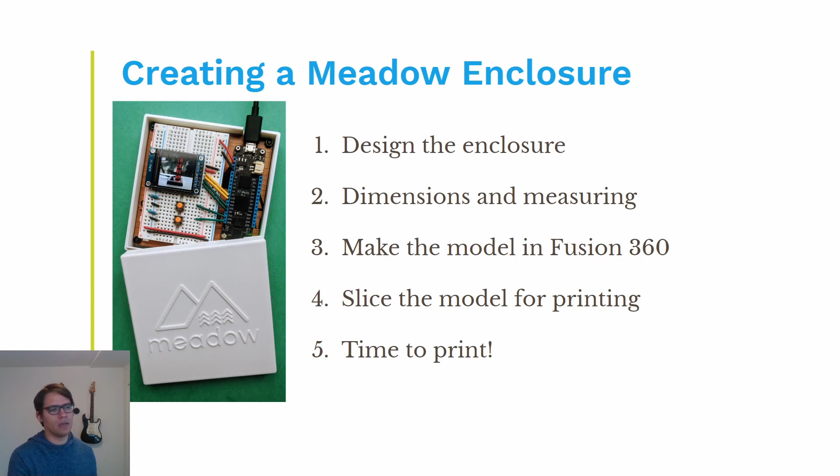So what are we making? Well, as I said at the beginning, we're going to make a Meadow enclosure for your dev kit, which is the one you see on the slide. It's just this little box here, where you have your Meadow dev kit here, and you also have a little hole here so you can connect it via MicroUSB. Even if your box is closed, you are still able to plug it in.

We're gonna put a branding Meadow logo on the top, and so yeah, this will be the end result. Notice that on the inside of the box we have these little cubes that are just gonna help you lift your Meadow dev kit in case you don't have those stand-up legs on the corners of the wooden board. So it'll make your dev kit, your Meadow, sit nice and flat in the box.

So the first step will be drawing your enclosure. You have to get a pen and paper and start drafting what your end result is, what you want to accomplish. So in this case, we want to make a little box for the Meadow enclosure. So I made here a representation of what you might end up making depending on your drawing skills.

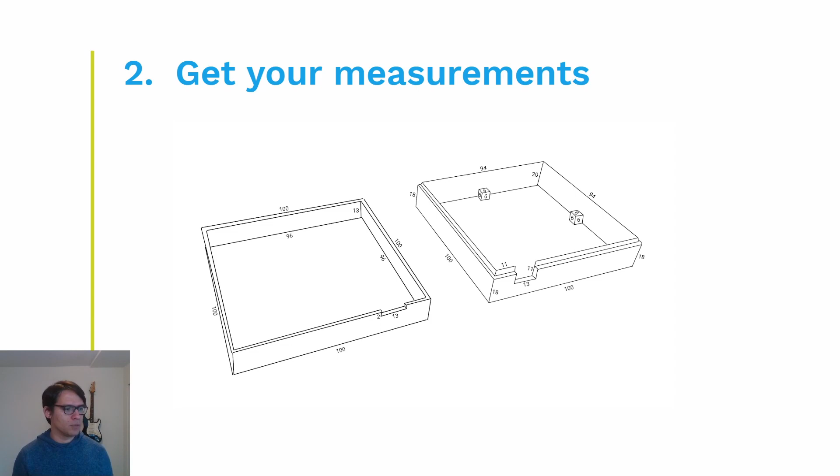So yeah, step 3, let's make it all in Fusion 360. So let's just get to it. I'm going to transition here to my other screen. There you go. You should see now the screen for Fusion 360. It's modeling software by Autodesk.

There's also a free version. It's a personal, not for commercial use version that you can download, and you can just take advantage of all the different features that they provide. And it's actually a really great tool.

I'm very new to using the software, so I'll try to be as simple and explain it as clearly as I can. I'm sure there are other ways of doing things that could be faster and more efficient. I am relatively new, so I'll just show you how I went about building this box from the start.

So the beginning of this landing page on Fusion 360 is the structure of the project. It's based on components. Right now, in the brand new project, you'll have one component.

It's expressed in this white icon here, but then you can also create subcomponents inside, which in this case is perfect for what we're going to do, because we are going to create two components or two parts for this project: one for the lid and the other one for the base of the box. So let's start putting together the base of the box.

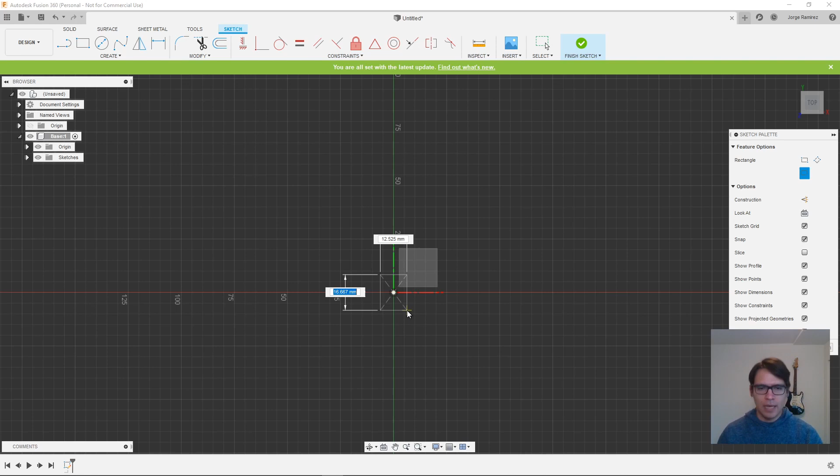So we click here, and notice that you can first select on which plane you want to make this first sketch. So I'm gonna select the Z component, and this will be the first sketch that we're gonna make. So the first thing that we're gonna do is build the base or the floor of your box. So we're gonna press S here, look for center rectangle, and then we click the origin so our box remains nice and centered, and we're gonna make this 100 by 100 millimeters like that.

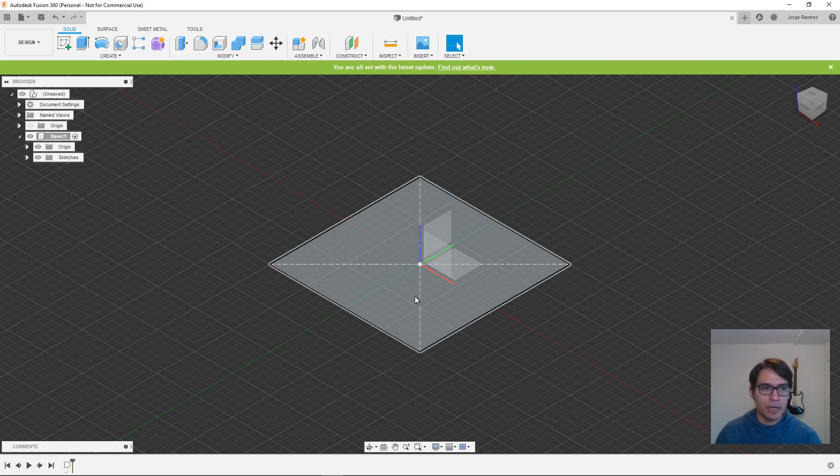And now that is our first sketch, which will be for the floor of our box. So we click finish sketch, and now that we have our square 100 by 100, we're going to use this feature. It's the one that I've used most, the extrude function, and we select our sketch, which is our 100 by 100 square, and then we're going to extrude this. We're going to pull it up to start creating volume, 18 millimeters. Great. So now what we have is a 100 by 100 by 18 millimeter box of solid PLA plastic filament.

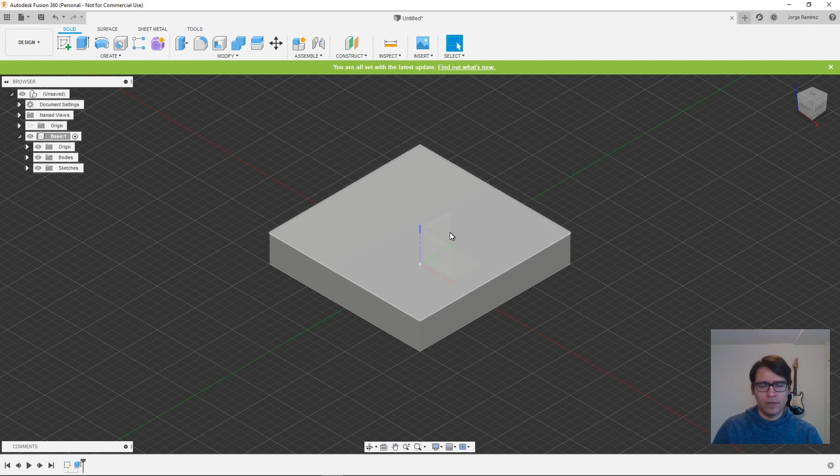So right now that's good, but we need to make it hollow so we can fit the Meadow inside. So we're gonna create another sketch, and this sketch won't be against any of these planes. We're gonna select one on the top face or the top side of the cube that we just made here, the box. So we select it, we go back into top view, and we're now going to create two rectangles, and I'll explain why.

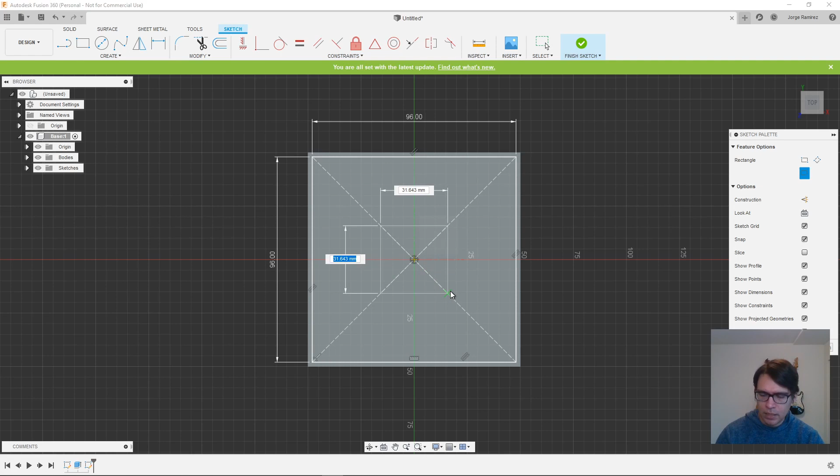So we're gonna create one that'll be 96 by 96 millimeters, and then another rectangle that will be 94 by 94 millimeters. All right, why did I need to create two squares? Well, because the box, you'll see that we have an inner border here that will help us make the seal with the lid, so the box can be firmly closed. So bear with me, and I'll show you how we're gonna do this. So we added those two squares. One's 94 by 94, the other one's 96 by 96, and we click Finish Sketch.

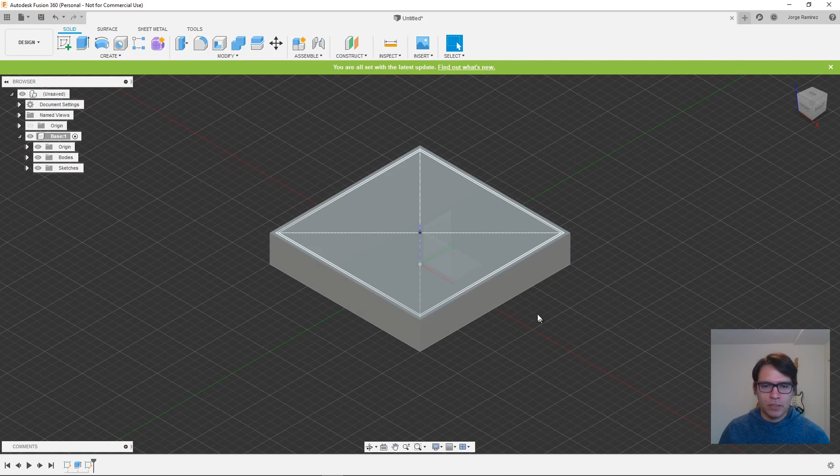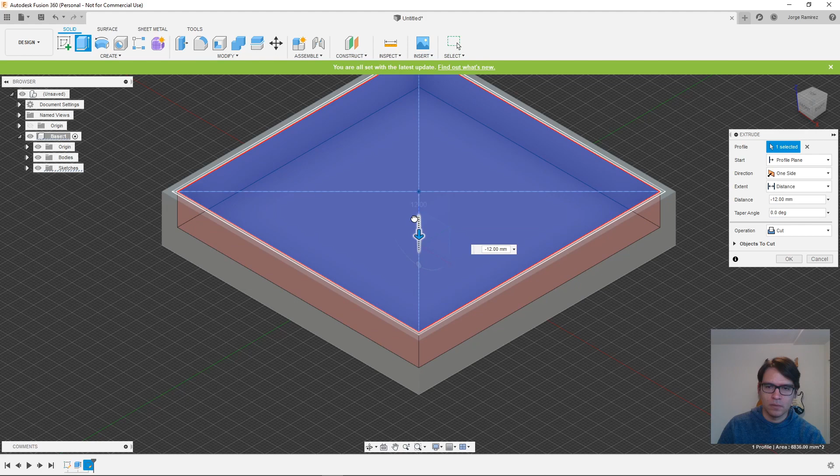We're back into our volume construction view, and now we're going to select our extrude function. We're going to select the square that is inside, and we're going to extrude this down by 16 millimeters, like that. Now notice it's not going to go completely down because we don't want to remove the floor of the box. We extruded up 18 millimeters, we're extruding down 16. So it'll be only 2 millimeters of thickness, which works okay. So let's click OK here.

And there we go. Now we have our box. It's hollow now, with a 2 millimeter thickness on the bottom, and there's 3 millimeter thickness on the walls of the box. Perfect. So the next step that we're gonna do is add the support cubes for your Meadow dev kit.

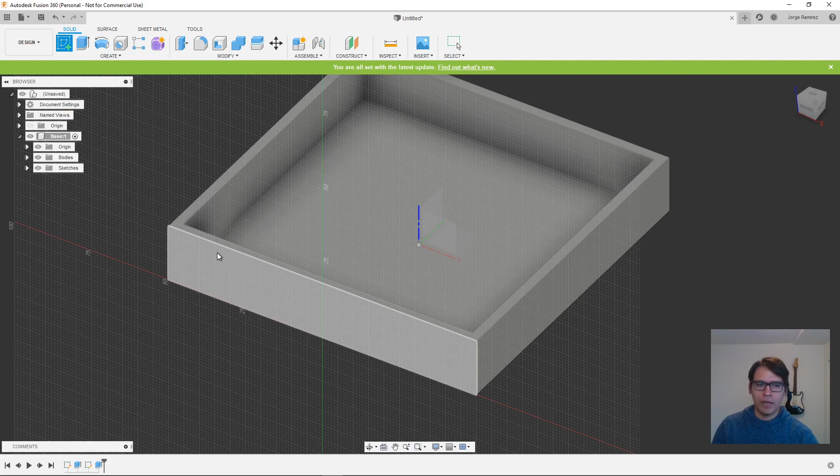So what we're gonna do now is create another sketch. And notice how we can create a sketch for each side of the box or the object that we're creating. In this case, we want to extrude up those cubes that we're going to have on the inside of the box. So we have to select a sketch for the inside of the box. So we select that.

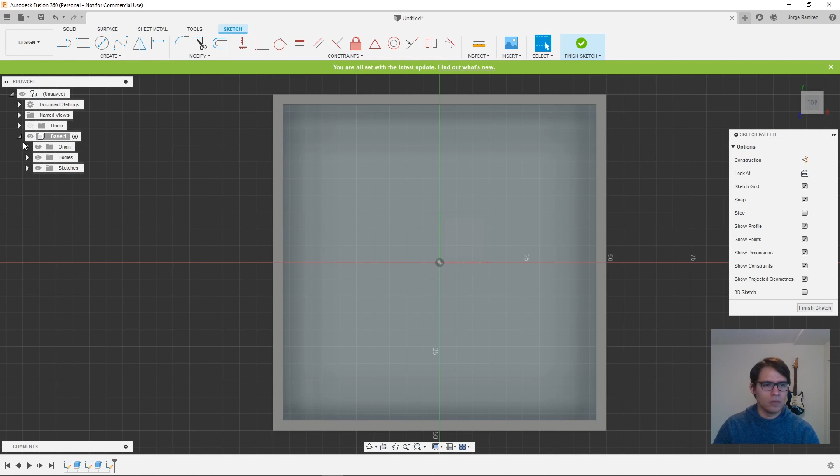And now we can also hide the body if we want. If it's obstructing our view, I'm going to hide it. And this is the lower floor of the contents of the box. And now what we're going to do is we're going to create 4 squares, and they're all going to be 6 by 6 millimeters.

We got one there, 6 by 6 millimeters, 6 by 6. Perfect. We have our square 6 by 6 on all sides, but now what we need is to properly align them. 3D printing here has to be very precise.

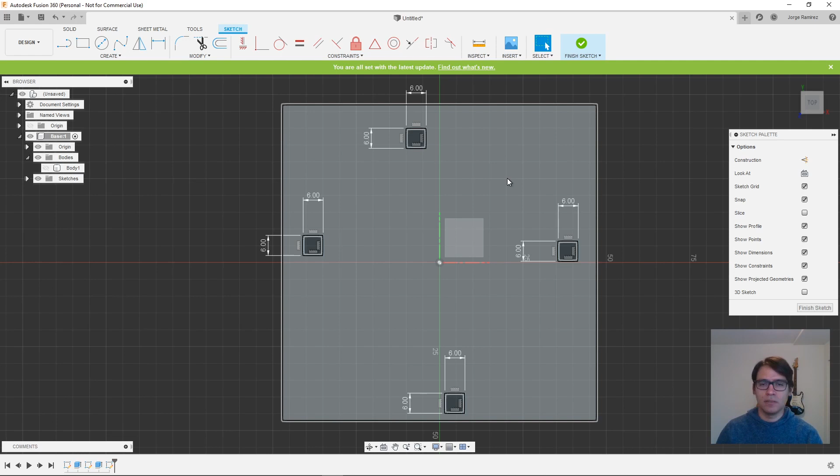So I'm gonna show you how to use constraints. You don't want to eyeball these things. You want to do constraints or relationships between objects or edges, so everything is very nicely aligned and very precise, because once you start printing, you have to see that everything is where it should be.

So what we're going to do is I want to align the center of this cube with this middle axis here, which is the y-axis, which will be the middle part here of the box. So to do that, I'm going to zoom in here a little bit. I'm going to create a line, but this line will be a construction line.

A construction line is just like a guideline for when you want to do some kind of relationship or a constraint to align something, but you don't want it to be selectable for extruding or doing anything to manipulate or change your body, your 3D object. So I'm going to create a construction line here that is going to be this vertical line here.

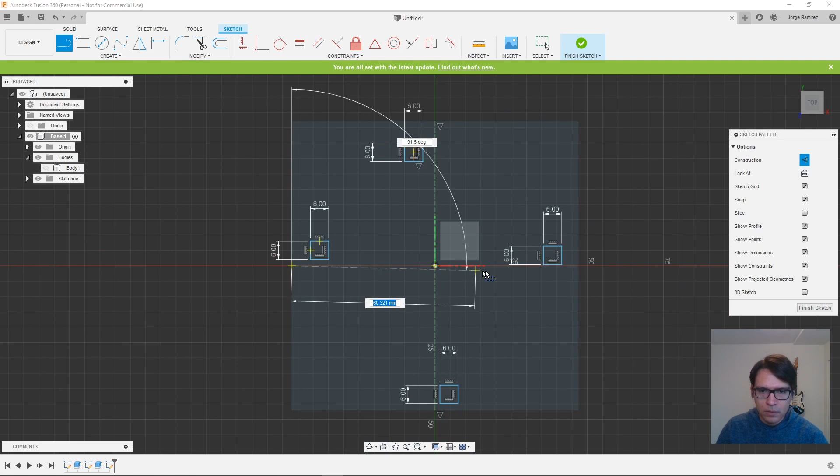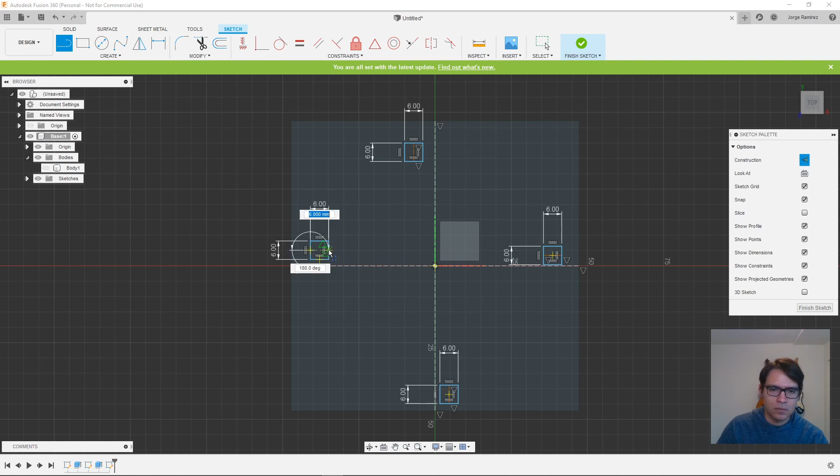And then we're also going to add construction lines for this axis here. Here we go. We also need to put one vertically for the lower square and these horizontal ones, because we want to align this construction line that's horizontal with the horizontal axis, which is the X axis. So perfect. Now we have all our construction lines.

Let's turn the construction line off. Let's click the select function. We go in, zoom in a bit, and we're going to use the collinear function. This will help you when you select two edges. They're both going to align with each other. So say if I want to align this line here with the axis, you click both, and there you go. You have aligned both of these construction lines together, and now it's all nice and centered.

Now we want to align this edge there of the cube all the way to the edge of the square. So we're going to select here, and we select this part here on the edge of the box. There we go. So we got the top square all nice and aligned inside the box. Let's do that for the rest.

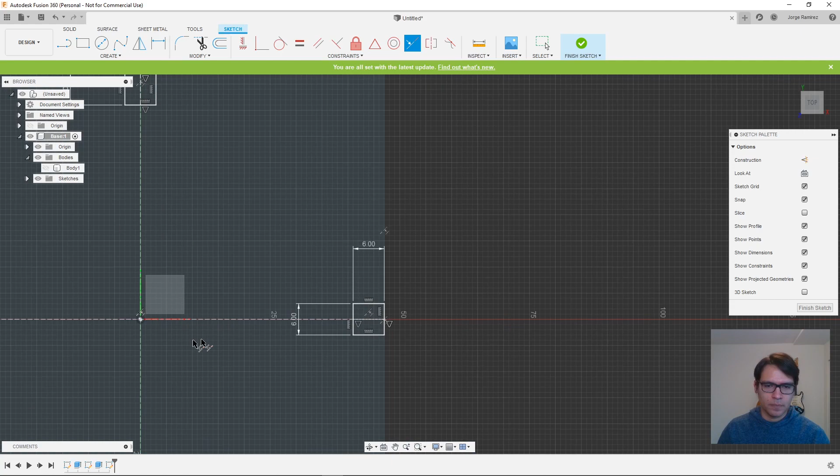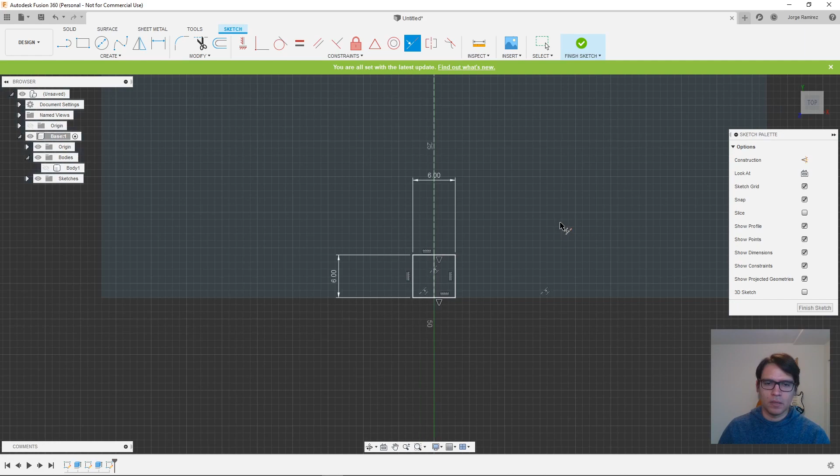So I select this horizontal construction line with the X axis, and then we're gonna select this right edge of the square with the right border of the box. And now we're going to do it for the left side, like that, and then these edges here. And now we have to select the vertical one with the y-axis, and then this edge here, the one on the bottom. There we go. So we have all our squares nicely aligned and placed where we want them.

So now we click Finish Sketch. We show the body again if we want. And now we go back into using our extrude function. And now we select all these cubes that we just drew. And now we're just going to extrude them up by 6 millimeters. 6 millimeters. There you go.

So now you have all 4 cubes there. They'll help you to support your Meadow dev kit inside the box. So if you don't have any standoff legs, it'll be perfect. It'll just keep it leveled inside the box. So that's it. So we have the cubes for now.

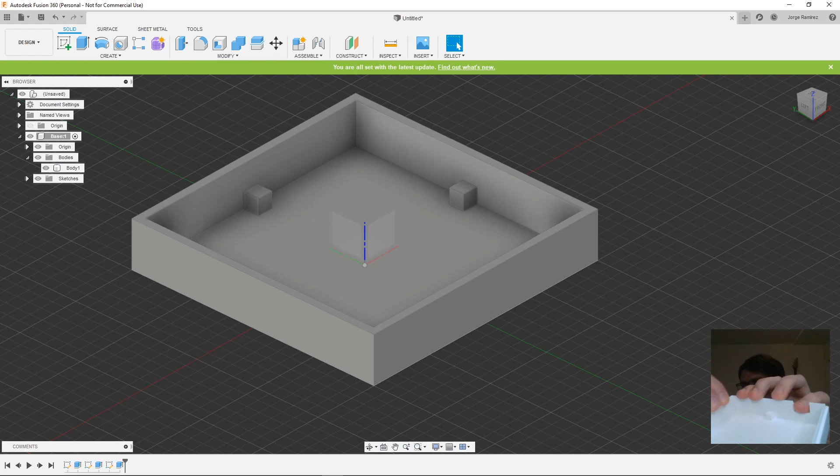Now I'm going to move on, and I'm going to show you how to make the sealing border here of the box, which will make contact with the lid so they both close like this. So for that, we're gonna go back into our sketches.

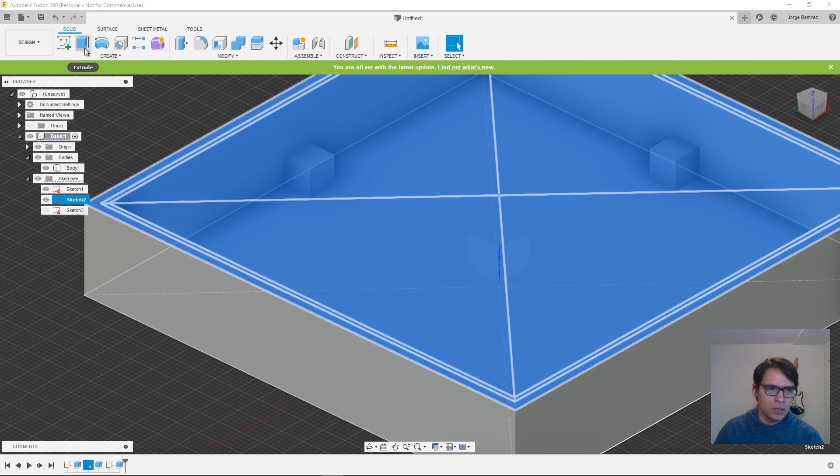We're gonna show the second sketch that we did, which had the squares in the middle, and we're gonna use the extrude function, and we're gonna select the outer square, the one in between the 94 by 94 square and the 96 by 96. And then that one, we're going to extrude it up 5 millimeters.

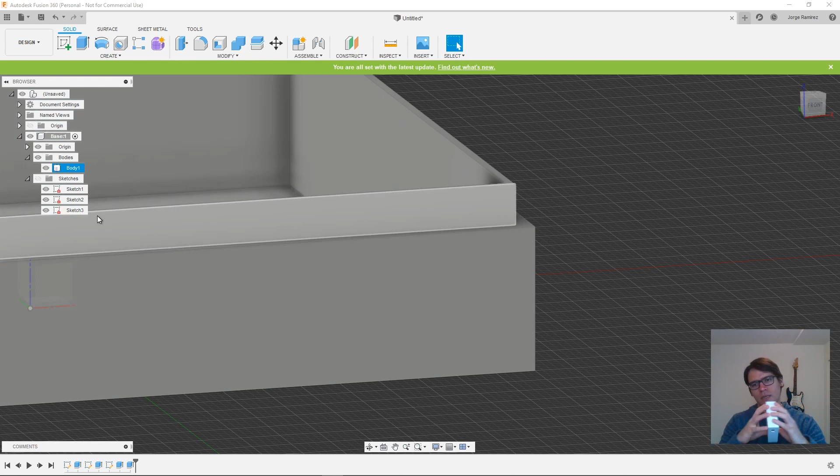Perfect. There you go, cool. So in my iterations, I noticed that when I do that border there like that, it's completely perpendicular and straight. When I wanted to close the lid, it's really hard to try to get all corners to align and fit, and then push it all inside so it makes a good seal. 5 millimeters is kind of a lot to make that sealing, so it's also really hard to do the separation.

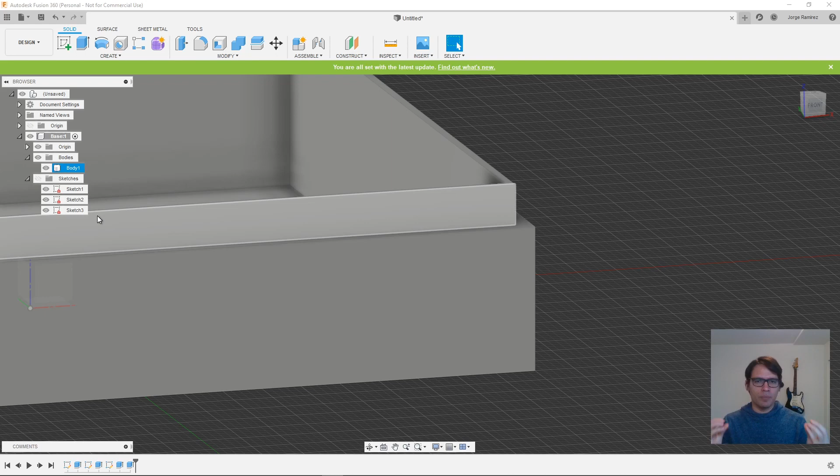So I ended up doing something called chamfer, which is like cutting the borders a bit so it's easier to place the lid inside, and also it won't be as tight a fit as it would if you left it like this. So we're gonna use the chamfer function. I don't know if you pronounce it chamfer, but yeah, this one. So notice how you select one edge, and then you can just cut it up to a certain angle to make that edge less sharp, I guess.

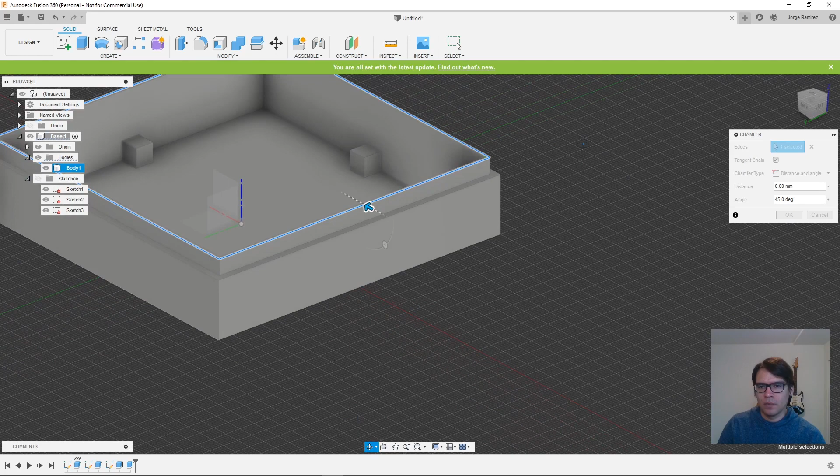So let's select the chamfer, and we're gonna select all the outer edges of our border that we just extruded. There we go. And now on chamfer type, we're gonna use distance and angle, because I'm gonna get a better angle here. So we want the distance to be 1 millimeter, but this is not enough. We want the angle to be a little bit higher. So let's put 75 degrees.

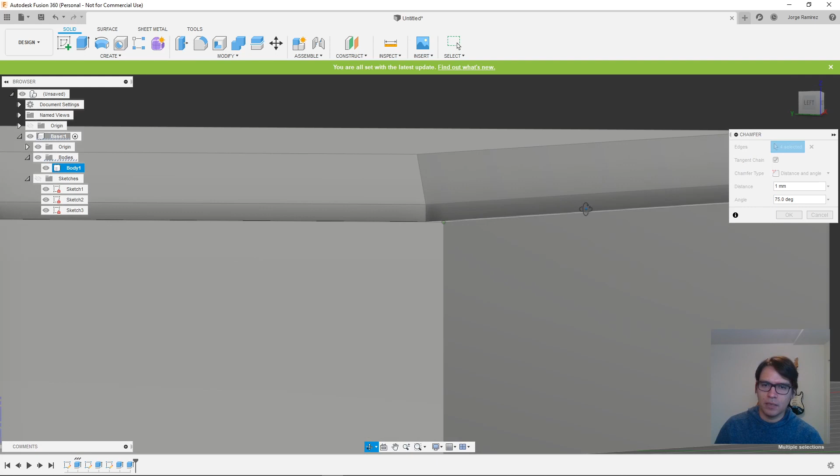There we go. So that way it'll be much easier to fit your lid inside of all the edges of that sealing, and then once you push them inside, the lid will make contact with the outer edge here, and that will make a nice sealing box, so it won't open in your backpack or wherever, if you're carrying it or anything like that. It won't open easily. So we click OK here. So we have a nice border for the lid.

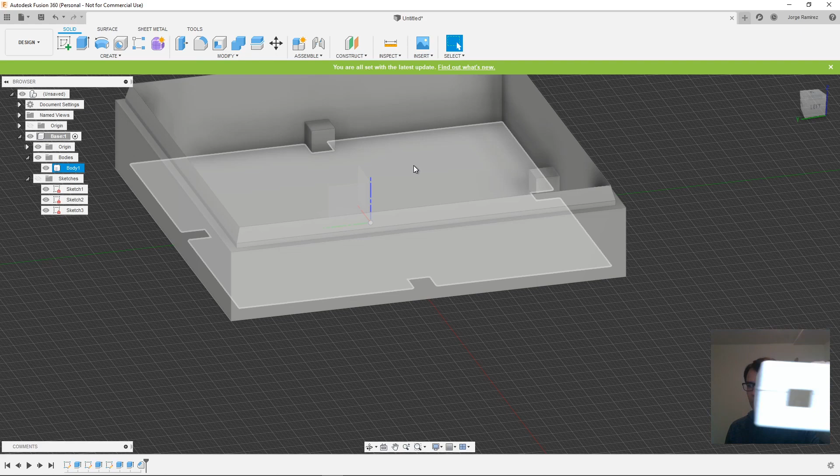Now the next step is we're gonna make a hole for the micro USB connector, which is something that we need to add here. There you go. So let's go add that hole there. So it's gonna look for the front view. I'm looking at the cube up here. Gives me a sense of where I am. And we're gonna create a sketch from the inside of the box. So we create a sketch there.

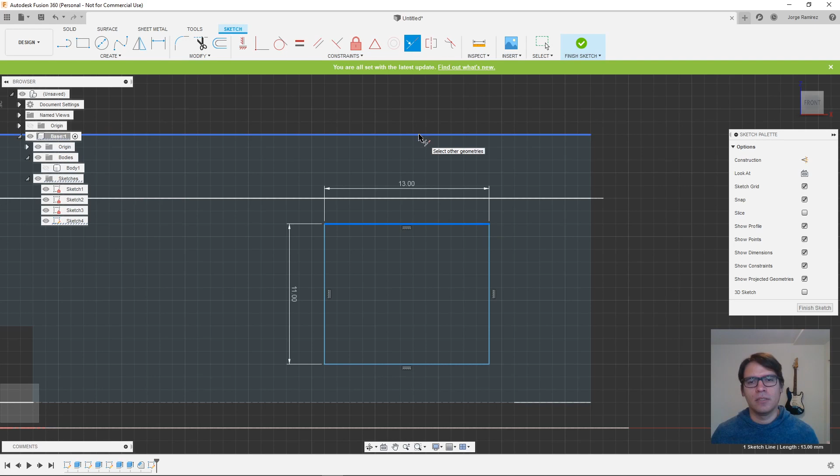We're gonna need to hide the visibility of the body, so we can see through the walls and see what we're gonna do. And we're going to create another rectangle here. And this rectangle is gonna be 11 millimeters by 13 millimeters. It'll look something like that. And we want that rectangle to be all the way into the top of our border here. So we have to use our collinear tool, and we're gonna say the top side of this rectangle, we want it to be on the top edge of our body here, and then we select it, and that's now all the way into the top.

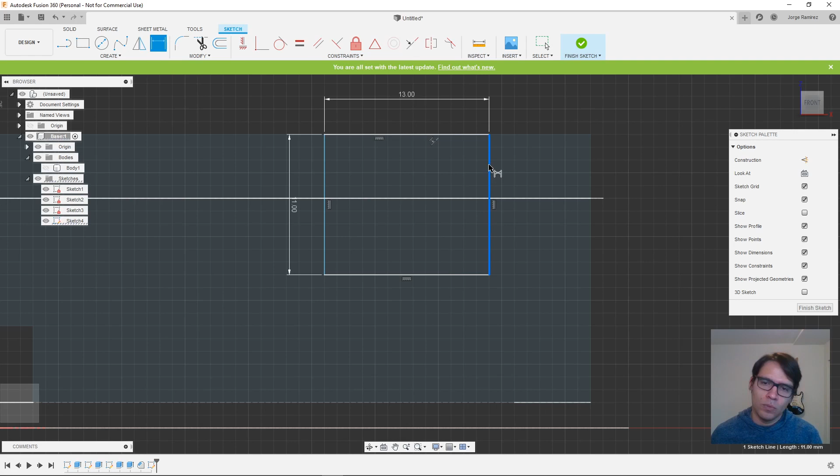But now we also want some distance, because we want to align it with our micro USB connector. So we have to use the sketch dimension feature, which we select right now. We select one side of our rectangle along with the edge of where we want to keep a distance. And then here we're going to select 11 millimeters. Like that. Perfect. There you go. So now we have the sketch for the hole that we want to make. So we click Finish Sketch.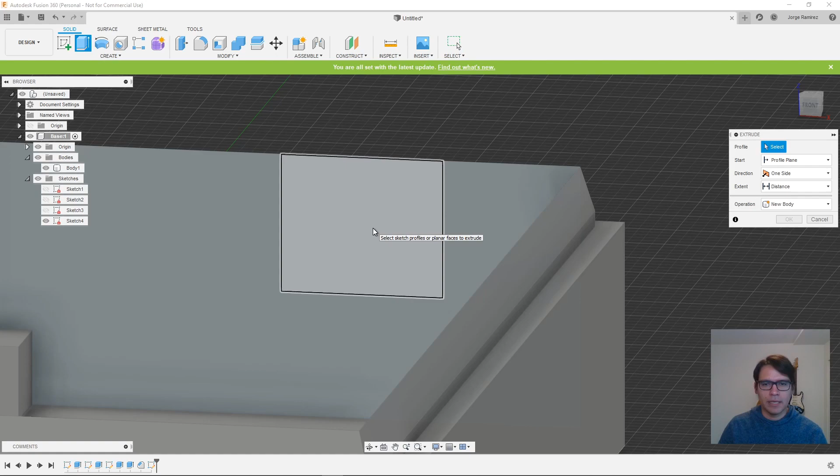Let's show the body again. And we want to show all the sketches. And there's our hole. So I'm going to hide the other ones just to keep the one that I'm working with. And now we're going to use the extruder. And we're going to select the rectangle that we just did. But notice if we're extruding up, we're going to create volume. We don't want to do that.

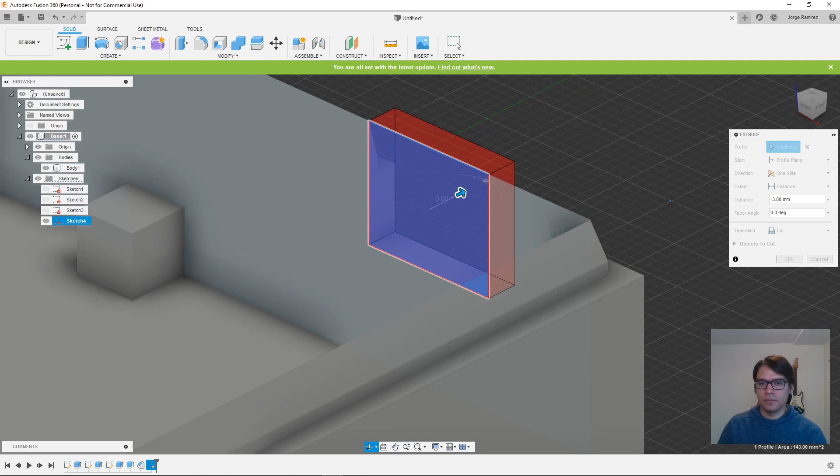We want to go 3 millimeters to the back, so it'll just create the hole that we want. There we go. 3 millimeters, and that's it. We have the hole for the micro USB for your dev kit. Pretty cool.

Now another nice touch that I also learned is when you print something like this, you'll see I have these edges on the box, so they're not very comfortable to hold. So what we can do is click on the fillet function, and we can soften or round the corners of our object. So let's select all these edges here of the box.

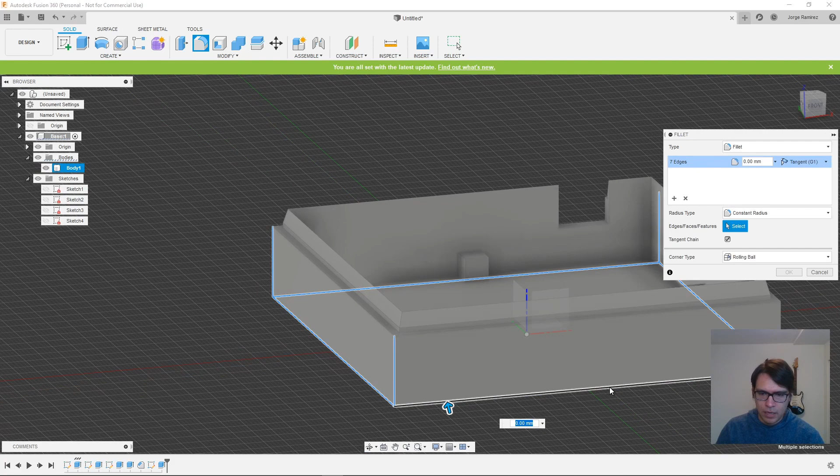There we go. Now let's say I always put 2 millimeters. There you can see how the borders of your box are now all rounded nicely. It's more comfortable to hold.

So that's it. That's basically all the steps you needed to do to make your enclosure, at least for the base. Now let's move on to make the lid, which is much simpler.

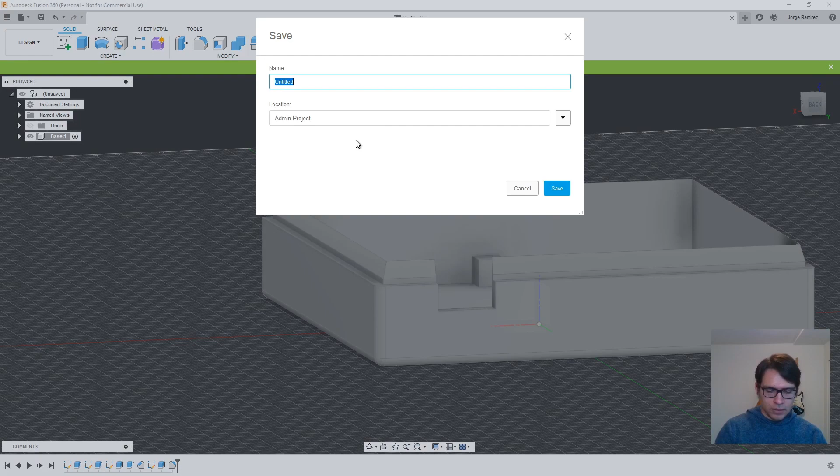Perfect. Now let's right click on the root of your component tree and create a new component. Here, this is the new component. We click lid, we name it lid. Let's hide all the base stuff that we did, because we're now focused on doing the lid.

I haven't explained—to rotate the camera, normally what I would do is use your wheel key. If you press it, you can pan your view like this. If you move the wheel of your mouse up and down, it'll help with zooming. And if you press shift at the same time as your wheel button, when you drag it you'll move. You can rotate the camera however you like.

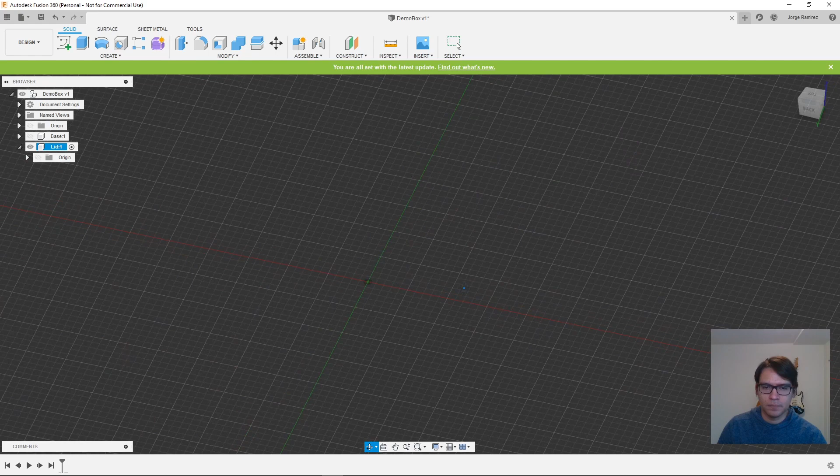All right, so now let's start doing your lid. Let's start again, and we're gonna create another sketch starting from the Z-axis.

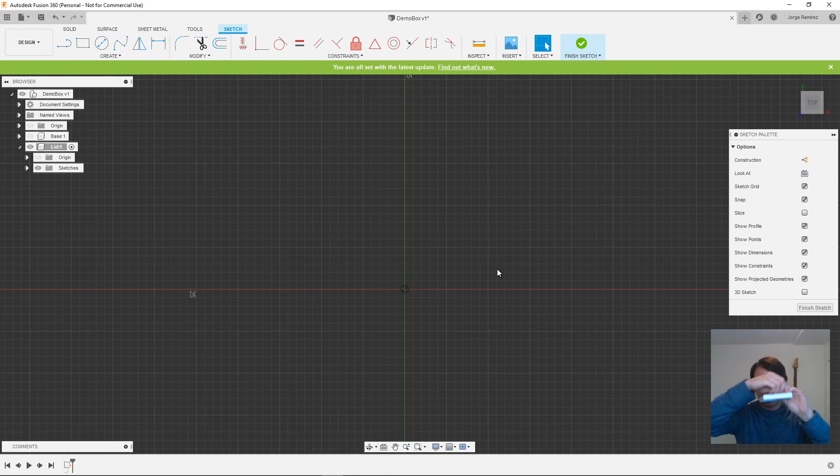The way we're gonna make the lid is a little different than the base, because this box has a Meadow logo on it, and we want this part to be the last thing that the printer is gonna extrude, the last thing it prints. So we're gonna make it print the walls first, and then after it starts printing all the walls, it'll go corner by corner and start building your top wall. Once it reaches a certain level, it's finally going to start printing the Meadow logo on top.

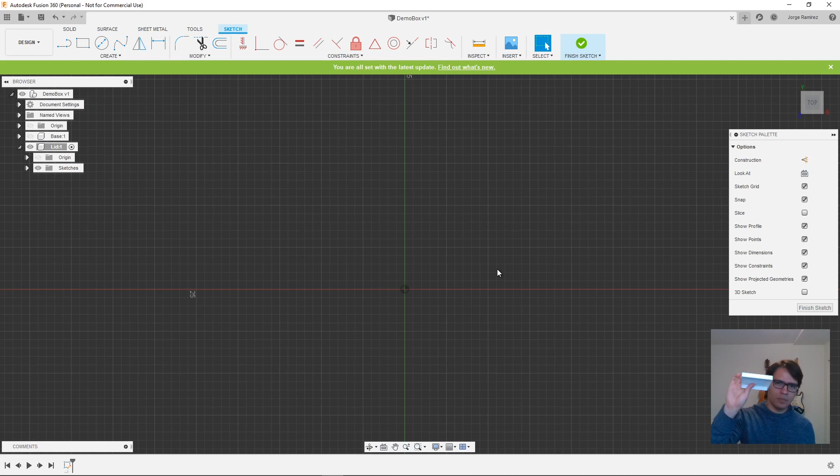If we did it the other way, it'll be harder for the printer to make this box, because the first thing it would print is actually the Meadow logo, which is sticking out. After finishing the logo, it would need to make supports to build the rest of the top side of the box, then proceed to making the walls, which is not ideal. It's better to just start making the walls and then make the top lid in the end.

Okay, so we have our top sketch all set up here, and we're gonna create another center rectangle, this one's gonna be another 100 by 100, like we did on the base. Then we are going to create another rectangle here, and this one will be 96 by 96.

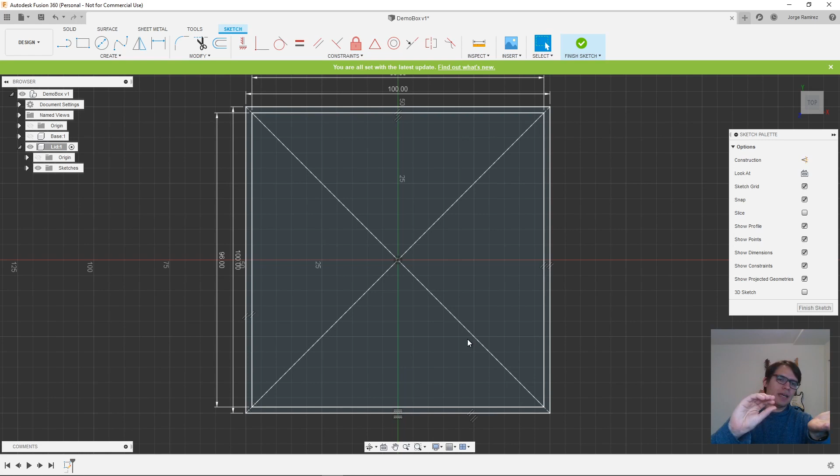Again, we're going to make the walls first. So we're going to extrude up both squares, and then we're going to select the inside square that we did, and extrude it down to make it hollow. I'll show you right now. So once we got our squares done—

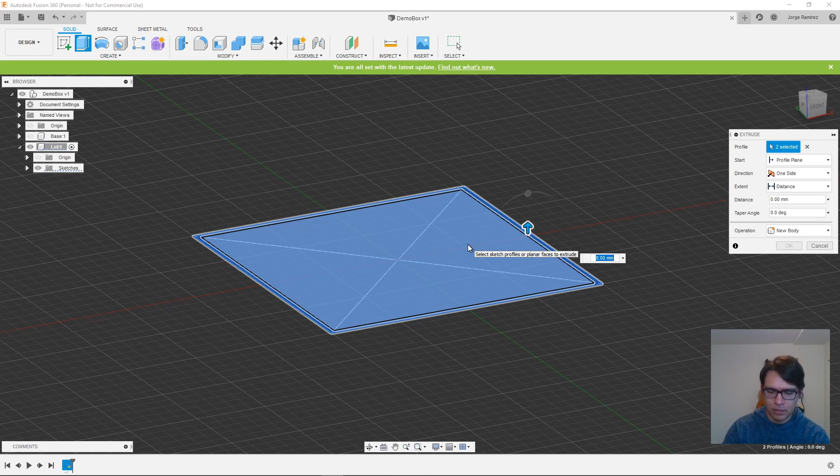we're going to use the extrude function here, and select both shapes, and extrude that up 15 millimeters, like that. Perfect. So now you have another 100 by 100, 15 millimeter box, solid plastic.

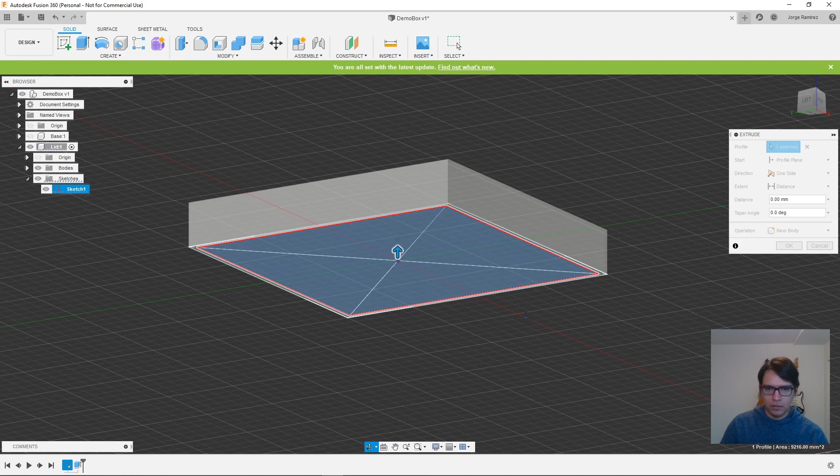So now we need to make it hollow. The way I do it is, let's show the sketch, and we're gonna have to extrude it from the bottom. Right now, if I use the extrude function, I can't select it from where I am because the body is right on top. I need to go underneath. I select the inner square, and then we're going to extrude that up by 13 millimeters.

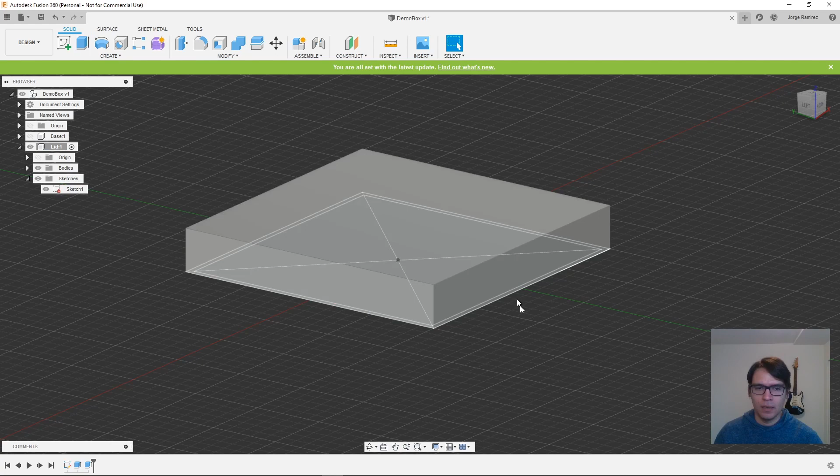There you go. Notice it indicates red that it's going to be hollow—we're not creating volume, we're removing volume. Click OK, and there you go. You have now a nice hollow box that will help us for the lid. It's going to be 2 millimeters thick on both the lid and the walls of this box.

So now let's make the other part for the micro USB connector. You notice I have a little connector here, a little hole I made for the connector, just to add a little bit of complexity. So I can show you.

If I close this, see how some connectors might be bigger than others, so I'm trying to be a little generous, and I needed to make a little bit of a hole here on the lid for the USB connector.

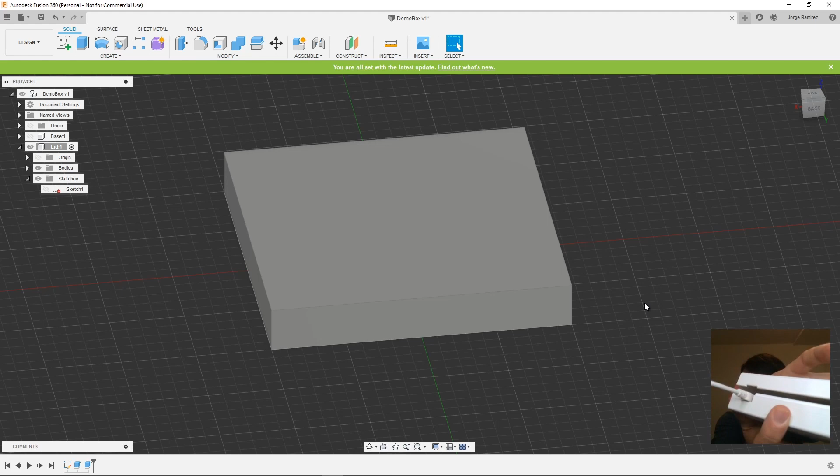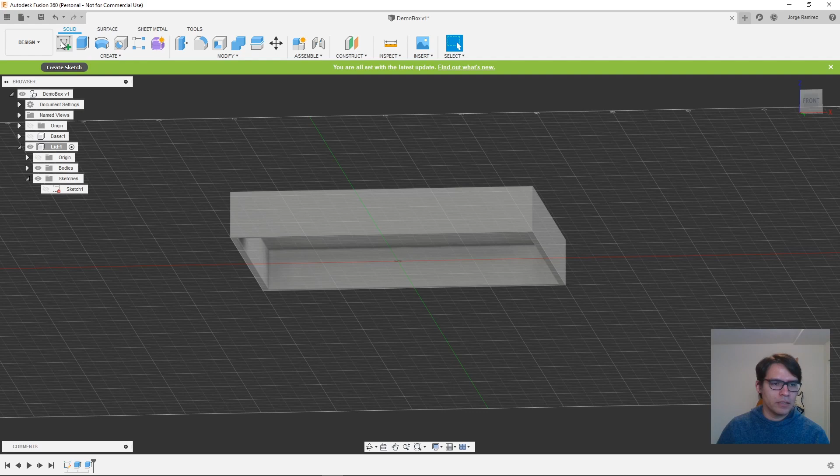All right, so let's build that right now. There are many ways, but this is basically how I did it. Let's go back, pointing into the front, from the front view on the bottom, because we want to make the hole around here. So we're going to create another sketch, and we're going to select the inside of the box. We select it. Now again, let's hide the body so I can see where I am.

And now we're going to create another rectangle. It's going to be 2 millimeters height and 13 millimeters wide. There you go. And now notice the top side is going to be the lid, and the bottom is going to be where the other part of the hole will be. So we need to align this rectangle with the bottom.

And now we're going to use the sketch dimension, and we're going to select the right side of our little hole, and the right side of the inside of the box, and we're going to add a distance here of 12 millimeters. The other one was 11 because the walls were 3 millimeters thick. This one's 2 millimeters, so I needed to add 1 millimeter to compensate. So now they're both going to align up nicely.

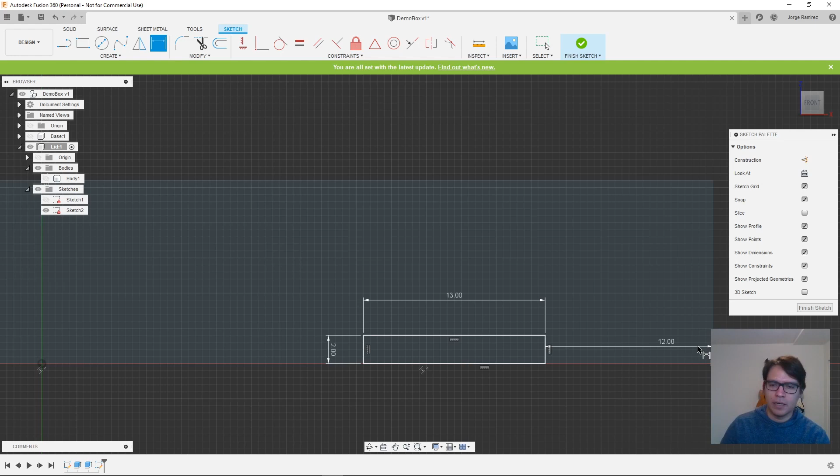Let's click finish sketch, and let's show the body here. So we have our lid, and we have the sketch of where we're going to make a hole.

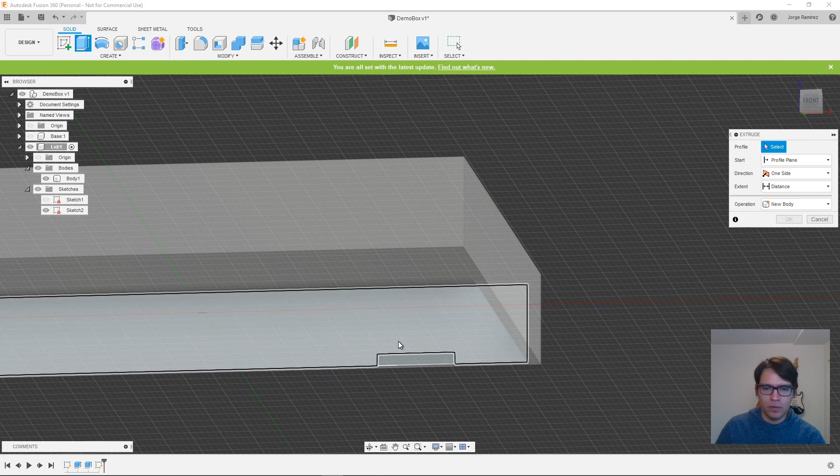So now let's use the extrude feature here. We're going to select this rectangle, and we're going to extrude that back 2 millimeters. As I said, this is 2 millimeters thick, so that's all we need to complete and make the hole for the USB connector. There you go.

Nice, see, it's pretty simple. Let's go back and add something really fun. Let's add our Meadow logo here.

So for adding logos and shapes, normally what you would get is a vectorized image, because rasterized images I don't believe are going to work. You need basic shapes that are nicely vectorized, and then we import them, and you'll be able to select these shapes so you can extrude them.

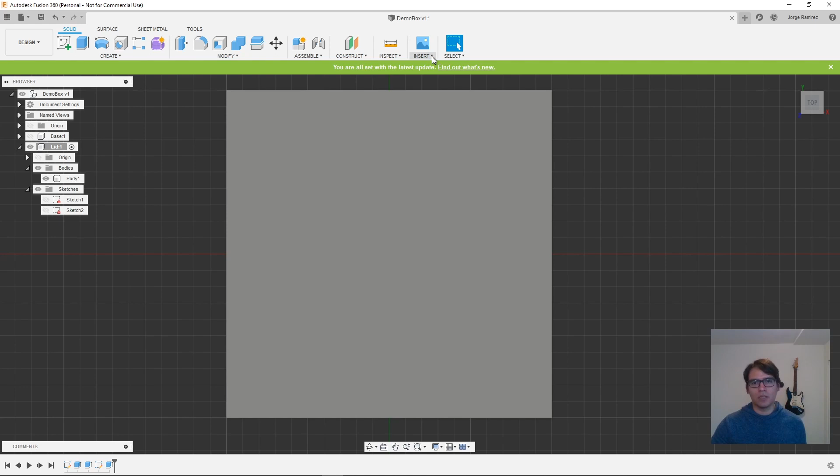So let's add an image. You click here on insert, and click on insert SVG, and it will open this insert SVG window, then you click on the folder, and here I'm going to select the Meadow logo bookmark.

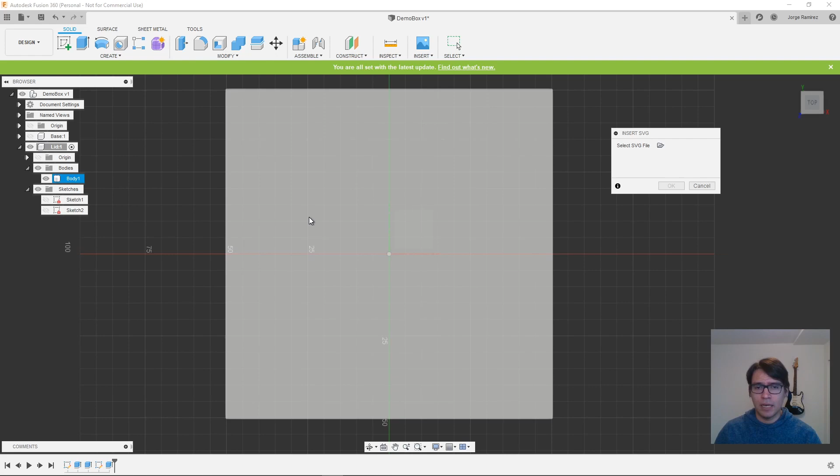And now I don't see the image anywhere. It's because Fusion is asking you to select on which face you want to place that image. In our case, we want to select the top face. There you go, so now we see our Meadow logo there.

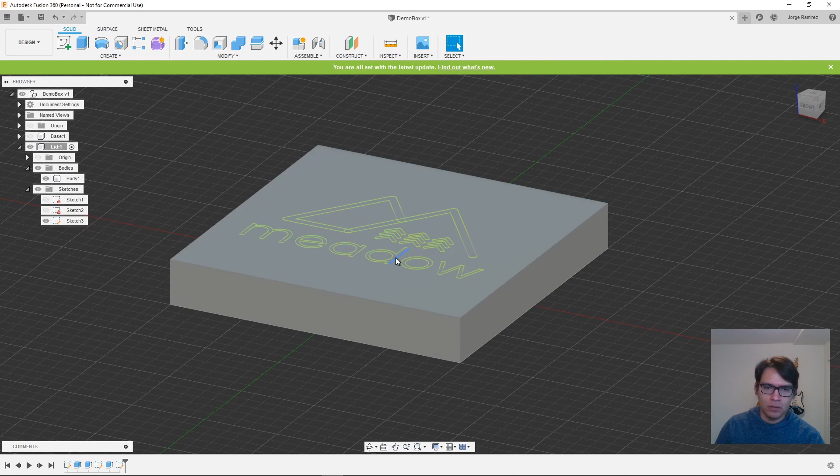We might need to do a little adjustment here. So let's rotate this and try to center it. There you go, I think that looks nice. And that's it, you click OK. We click finish sketch. And now that we have our Meadow logo nicely marked on our lid, what's left is to just extrude it up.

Just maybe half a millimeter. You don't want it to be too tall because it'll be awkward to hold. So let's use the extrude function again, and we're going to select all the pieces of the Meadow logo.

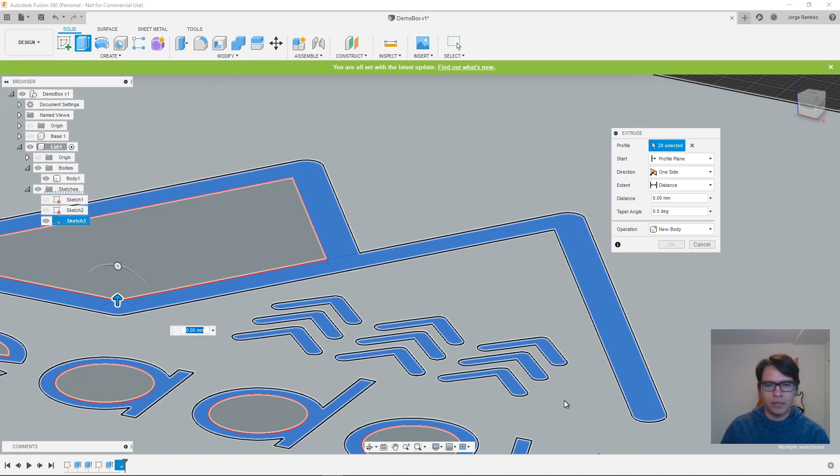We're selecting the trees. Now we select the mountains, and this circle here. And that's it, you have selected all the logo, and then we're going to extrude it up by 0.6 millimeters.

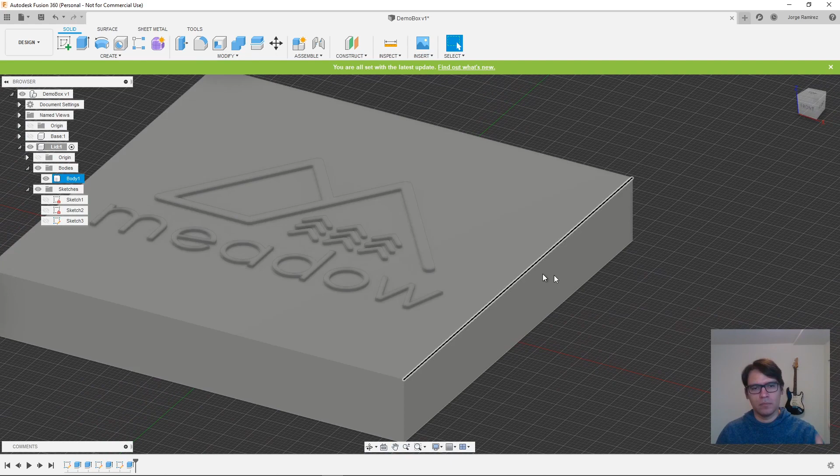There you go. You can extrude it to whatever level you want. My printer is an Ender 3 Pro, and it increases the levels of extruding by 0.2 millimeters. So with 3 passes on the logo, it'll be 0.6. I'm just leaving it to be less than a millimeter, but also comfortable. After 3 passes, you'll see that the logo will be at a nice, comfortable level.

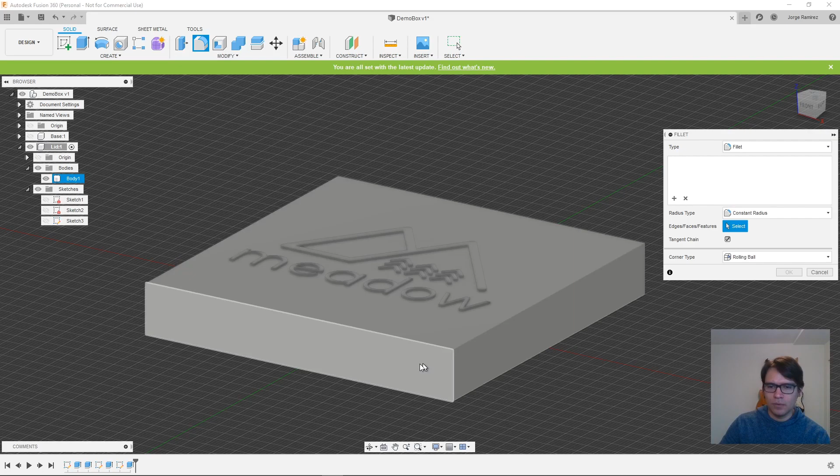All right, so we have our Meadow logo here, and the last step we have to do now is soften the corners of our box, so it'll match with the base box that we did. For that, we're going to use the fillet function again, and we're going to select all these edges here, the ones on the top and the corners.

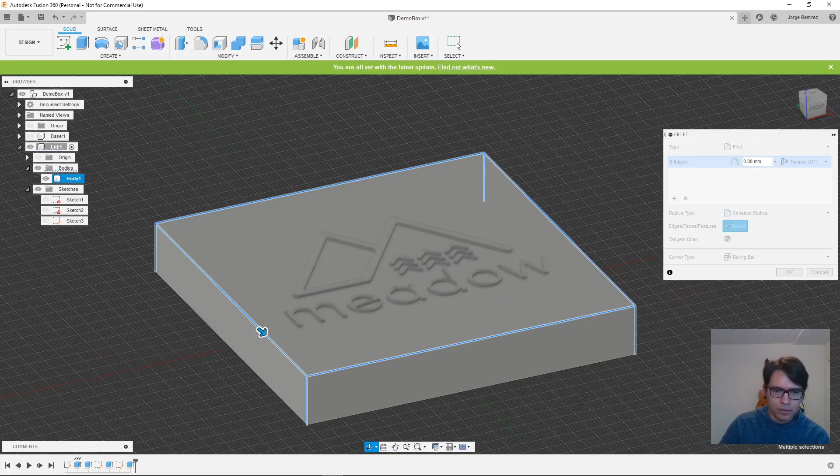Oh, I got this one wrong. Hold up, this one - there we go. We have to make sure we're selecting the right edges. Now we put 2 millimeters, and there you go - we got our lid part of the box ready to go.

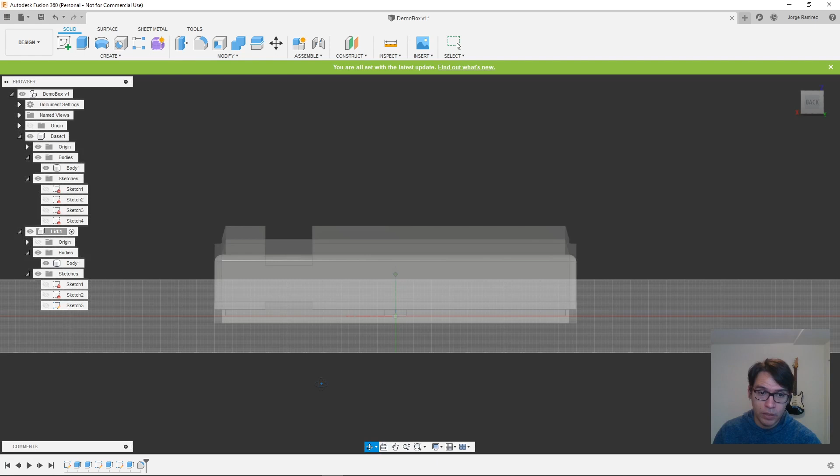If I show both of the bodies of the base and the lid, you'll see they're like one inside the other, but what I wanted to show you is how the MicroUSB connector aligns up nicely, which is what we really want. They're also in the same direction. They're square, so you can make the holes on the boxes on whatever side you want. I'm just nitpicky, and I just want to make sure that it's on the same side.

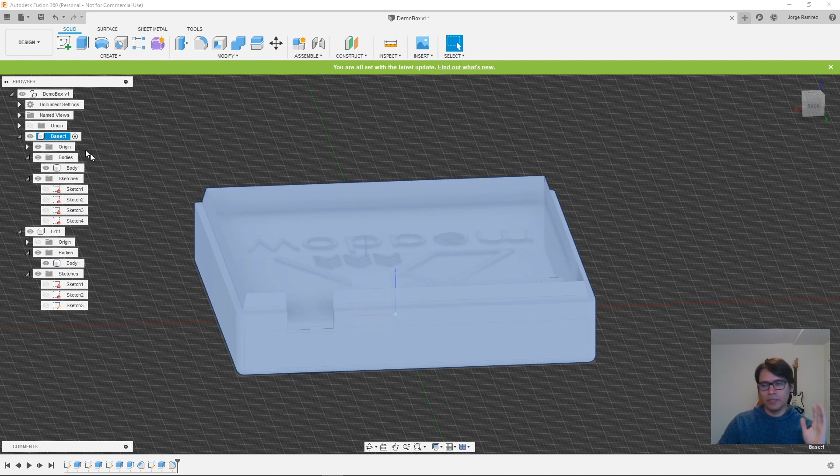So that's all there is to it to make the boxes on Fusion 360. The next step will be the slicing process, which I'll walk you through briefly. It's basically the slicer software - what it does is grab your 3D object and cut it, or slice it in smaller pieces, and establish a path for your 3D printer, so that the little nozzle of your 3D printer will know the path it's going to take and end up printing your box.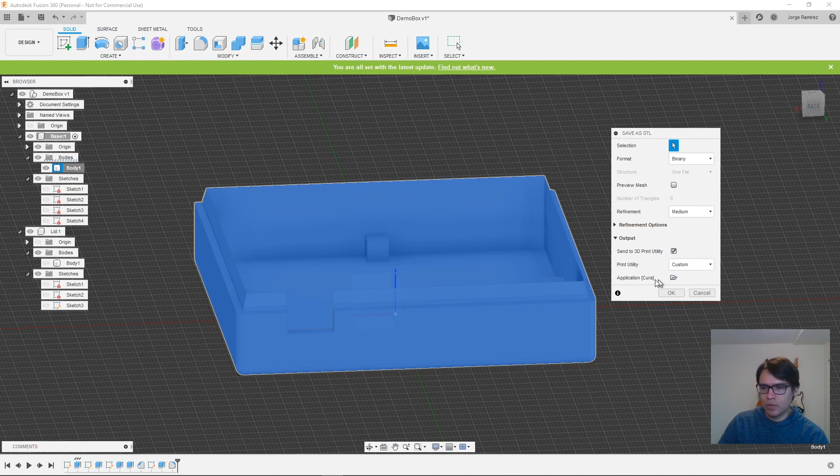I'm going to show you that right now. So if we go back here, we select the base and activate the component. We right click the body one that was generated for our box, and we click save as STL. That's a file that the slicer understands, and it'll start doing all the slicing process and exporting it for the printer. Right now I'm selecting the application - I'm selecting Cura, which is one of the popular slicing softwares out there. I'm gonna select that for now, and just click OK here.

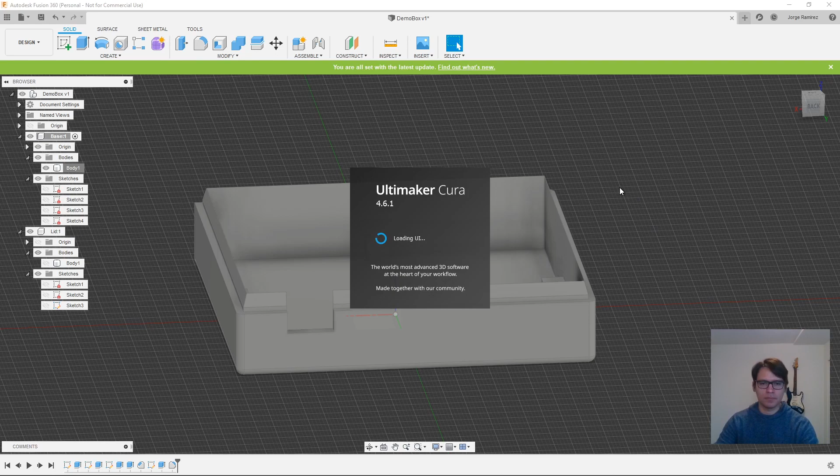And it will start opening Cura once it's done. Right, should open anytime soon. There you go, okay, so we have Cura open here.

I have a pre-selected configuration for the printer that you own. In this case, I own the Creality Ender 3 Pro, and this grid here is a representation of the maximum real estate that I have on my bed on the 3D printer where I can print. You'll see that the box is nice and centered. And now for this one, you can rotate it and you can see that it's all nice and good.

Then you click the slice button, and that's what it does - it'll process your object and establish a path for your printer to start printing it. It'll give you an estimate of how long it'll take to print, which in this case will be almost 7 hours. It'll take 59 grams and also 19.73 meters. So what it's referring to is how much of this, which is kind of like the ink for your 3D printer, is just filament. It's called PLA filament - it's just plastic that melts, and it'll start going through the bed and making your object. So we'll use 59 grams and almost 20 meters of this filament to create your box, at least for the base.

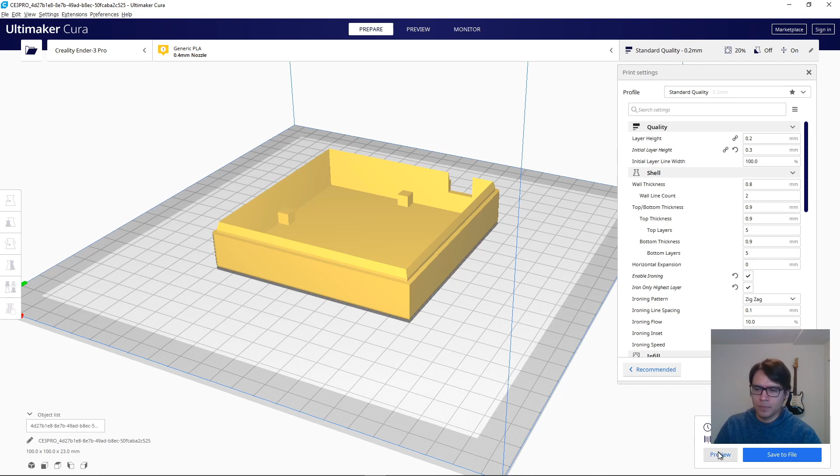You can also preview it - you click preview, and this is how it's going to look like once it's done printing. I noticed that it has extra plastic around here - it's basically what is called a raft. I want to make sure that my object has a nice firm adhesion, or the object sticks very firmly to the bed of the printer, so it does an extra layer that is larger than the actual object. This makes sure that your object doesn't warp or in mid print it'll unstick and start creating a mess.

And you'll have to start over. So I always end up using raft to make sure that my object is nicely placed and properly stuck into the bed, and I don't have those problems. It just takes a little bit longer, but once it's printed, you can even unstick that raft and rip it from the base of whatever you're printing.

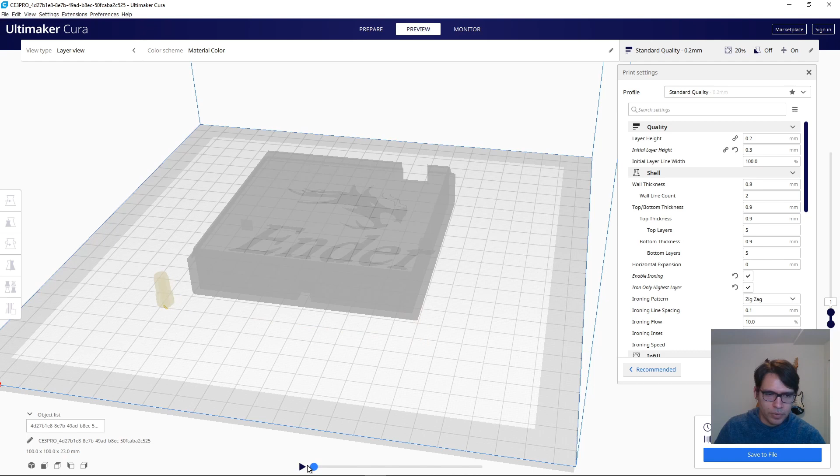So you can also see here, with this scrub on the slider, you can see the path that the extruder is going to start printing. So this one, you'll see how it's going to start printing - it'll first start going through the sides, and then it'll start making your first layer, which will be the raft.

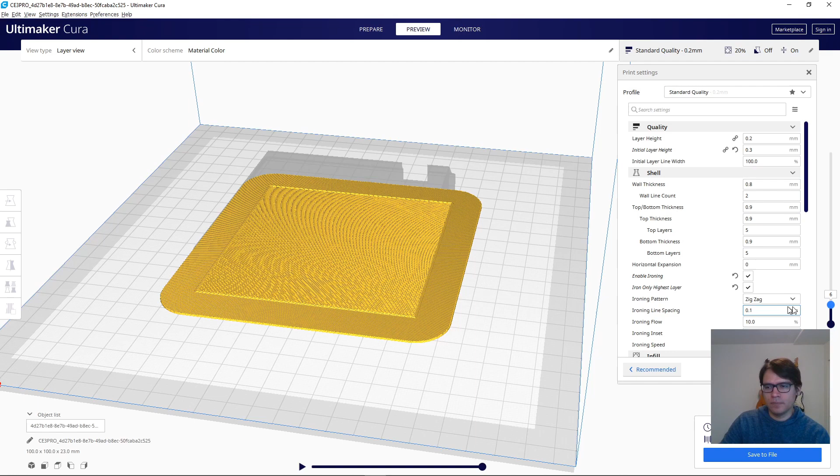And then as you go up into the levels, it'll start creating more and more. This is now starting to create the base floor of your box. And then it'll start moving on to making your walls with the cubes that are going to support your lid.

And notice, if we go here closely, you see that it has this pattern. It's because we're selecting an infill density of 20%. I don't need it to be 100%. I don't want it to melt or use a lot of filament to make this super firm. So just 20% will do it, and it'll have an infill pattern, which in this case is cubic.

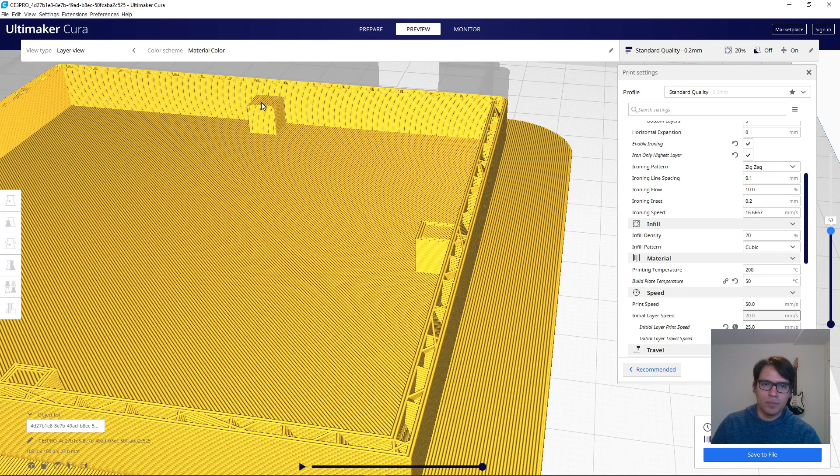So it'll start creating patterns of little cubes, so it's all equal distance, and it won't use as much filament for making solids like this. So once it starts going up, at one point at 6 millimeters, it stops making these support cubes, and it'll start going up. And then there's a point where it closes that pattern of infill, and it starts moving into getting your border for the lid.

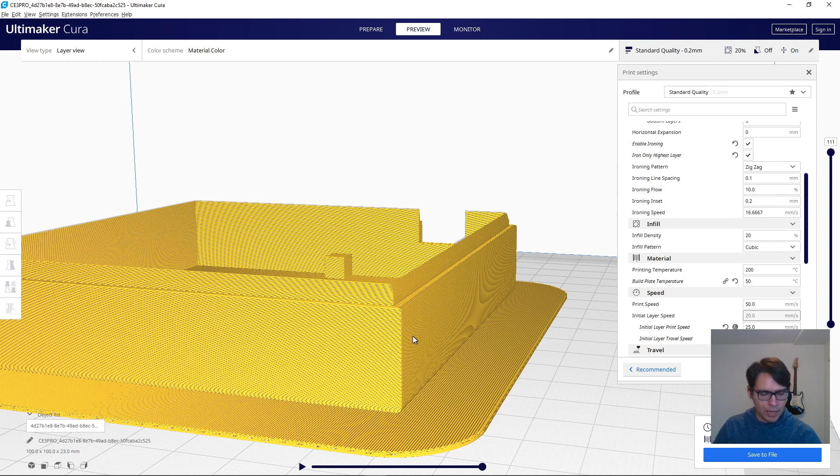And that's it. That's all there is to it. It takes almost 7 hours. It takes a while to print. But let's go back, and I'm going to show you how the lid would look. So let's go back to Fusion 360.

Now let's activate this component for the lid. Let's show it. We hide the base one, and now we're gonna right click the body. Same process, save as STL. We select here. We select Cura, click OK. And now let's wait for a bit to open Ultimaker Cura.

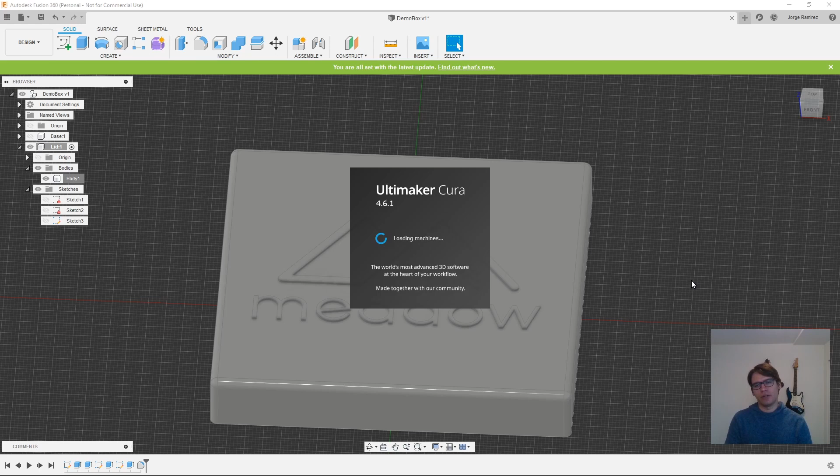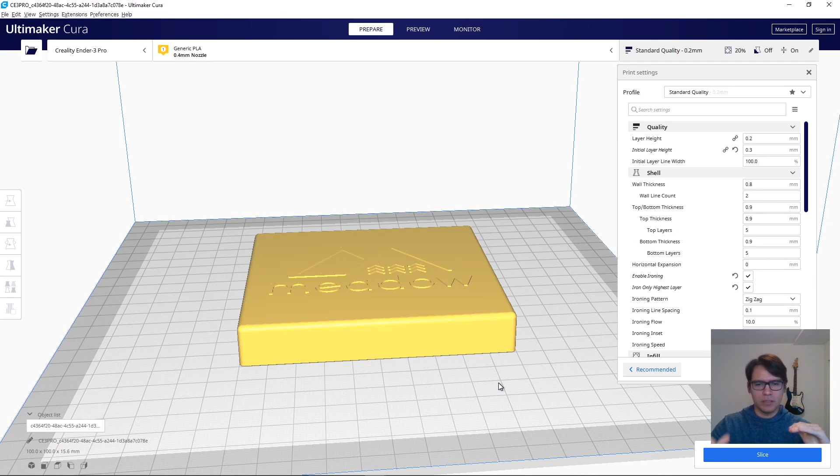There we go. Now it opened, and now you can see, as I mentioned before, it's starting to print from the walls, going its way up, and then start throwing layers on top between the walls, building that last thick 2 millimeter layer on top. And once it gets that 2 millimeter thickness, then it does the last pass, which will be printing the Meadow logo on the top.

So let's check out how it looks. So we click the Slice button here. This one will take 5 hours and 40 minutes. Around 50 grams, almost 17 meters of filament. Let's click preview here, and this is how it's gonna look.

So we'll have a raft, same configuration that I showed you before. Notice it's even hollow here because the only thing that is gonna need to stick to the bed is actually the walls. So the raft is smart enough to not create a whole layer of material. It will just do it under a certain distance of whatever pieces of the object are stuck to the bed.

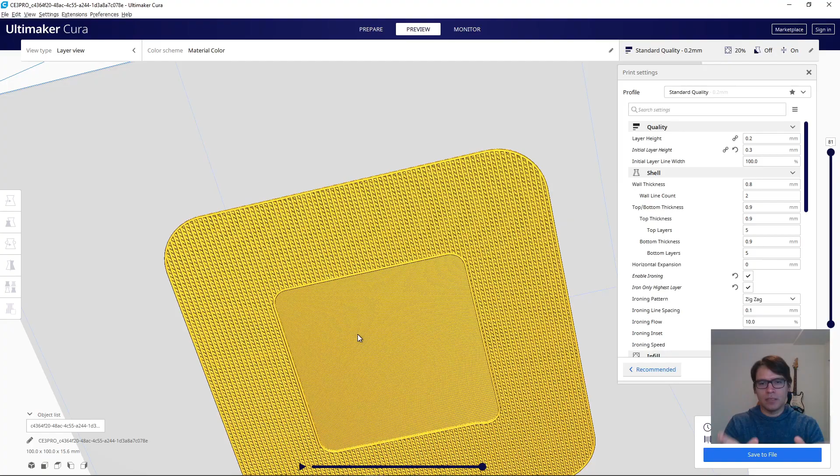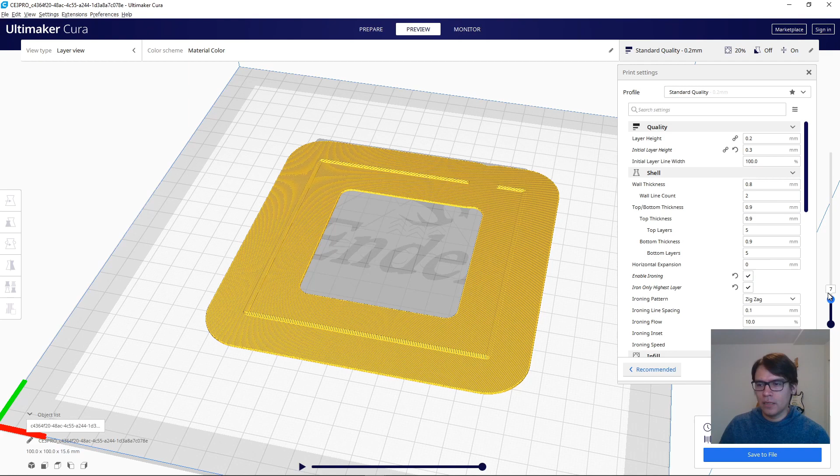And let's see it printing from the start. So if we go down here, there's your first layer, which will be the raft. And then I think it creates a couple more. Yeah. And then it starts building the walls of the lid. Notice here that it's starting to go back and forth because of the hole for the MicroUSB connector. And then once it reaches a certain altitude, it'll start doing the entire loop around.

And then it will reach a certain point where it's going to throw one layer of filament from corner to corner at a 45 degree angle from one side to the other. And then on the other side, it'll go perpendicular, and it'll start going in different patterns, and it reaches a point where it will start drawing your Meadow logo here. Should be the last part it'll print. There you go.

So after you slice it, you click the Save to File button here, and then you export that. It'll generate a file called G-code, and if you have your printer already connected to your computer, you can print by sending that file directly through the computer, or you can just save it onto a micro SD card, and then you connect that into your printer and it'll start printing.

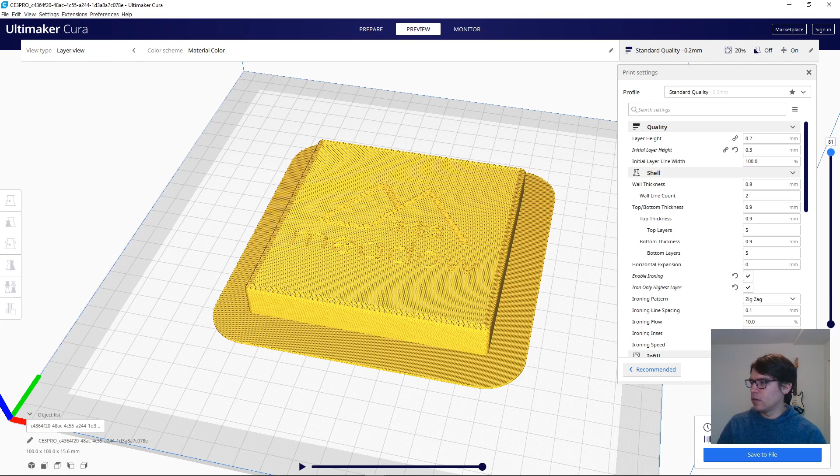So let's go back into our slides. And that's it. That's pretty much what I wanted to talk to you about. I hope you found this tutorial about how to make a 3D object, a Meadow enclosure using Fusion 360, useful. I hope you learned something. All these sessions will be available later on online, so if there are things that you didn't quite get, you can always replay it and follow along if you wish to create your own Meadow box.